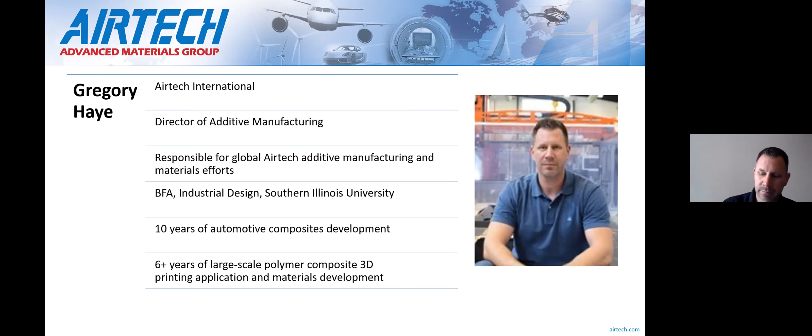Hello, my name's Philip Lunn, also with Airtech International. I'm the Global Technical Manager, responsible for global technical activities, developing products and supporting our customers with their applications.

I've got over 30 years experience of composite fabrication, originally starting in aerospace with some time in automotive and motorsport before I joined Airtech Advanced Materials Group about 24 years ago, and come to the project of 3D printed tooling with the experience of fabrication of composite tooling using traditional wet lay-up, pre-preg, resin infusion type processes to produce composite tooling, and bringing that understanding to the development of 3D printed tooling to develop tooling which is meeting the requirements already expected by the market, but building on that as well and developing and improving what can be achieved with tooling for the composite application.

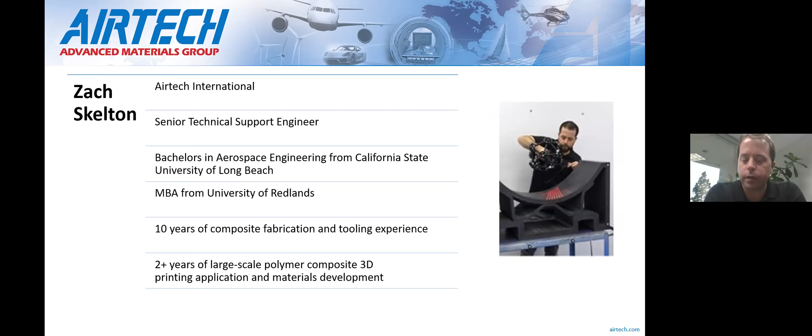Thanks, guys. So as you see, we brought a good team for you guys today, and we're going to kind of walk through trying to bring some clarity to the technology readiness of these resins and this process. And so on the back end of this, Zach and Phil will both be available, as well as myself, to talk through any follow-up questions you guys may have in a Q&A session. So we look forward to your questions on the back end of this.

Really, additive manufacturing is a new technology for most people, but there are many barriers to production use that people tend to recognize or think are not yet mature. So these are some of the things that we've recognized that are either commonplace or people's perceptions. But generally speaking, there's been a lack of mechanical data on the current materials that are available for primarily these FDM or FFF type of applications using filaments or pellets.

And maybe not a whole lot of information of these tools or end-use parts being proven in application, especially at large scale.

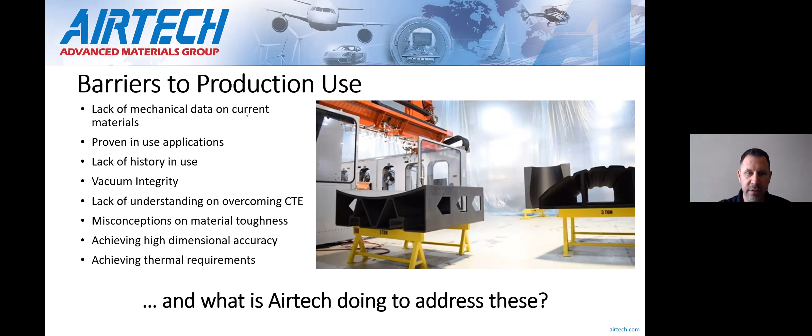And so we kind of took this as our goal, to go and solve these problems, right? So not only just the materials themselves, but looking at the materials in their application, and can we prove out their performance?

So from a materials and functional testing perspective, most materials on the market, the standard was just using injection molding data. And that's not real for these applications, right? The properties you get in X and Z are much different in a printed specimen using FDM or FFF type processes compared to an injection molding compound. The properties in all directions, as well as the CTE, are all impacted by this versus an injection molding type coupon.

So this really helps us, starting with the right data, helps us and our customers that are designing these tools or structures to have the right toolkit, the right data to make good informed decisions on design and how the tool and our part is going to work in their applications. Without these key metrics of data from printed specimens that are subjected to testing in these various modes, it's very difficult to do a proper analysis and proper design.

So we've made that our mission, to go through and do all this work, have the entire list of all the properties for these materials in their applications, in a printed application, and then be able to hand this to our customers, either that we're producing tools for, or that we're providing resin to. And we're fully transparent about this. We do it even with third-party labs to validate this information. So it's fully open to our customers: here's the actual properties, there's no marketing to it. It's here's the data and here's it verified by third parties.

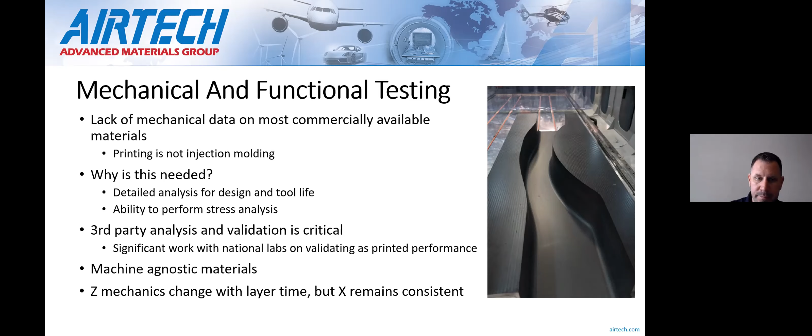Again, that track record's been missing. And so we're going to prove that.

Our focus has been specifically on tooling, as Airtech is supporting our broader global composite customers. We are looking at how do we solve these problems for our customers every single day in various applications. So everything as simple as a printed master, basic trim jigs, drilling jigs, or sawing fixtures. These are low duty applications comparatively, but require good, tough, durable, and accurate surfaces. So we do that all day, every day with a lot of our customers, even in production type rate tools today. But the biggest scrutiny is to come on the high temperature side of things.

And this is where a lot of people seem to be most interested, is high temperature tooling applications, right? So either high temperature out of autoclave or high temperature in autoclave is where there's a lot of cost in the tooling and a lot of time. And so this technology with our high temperature resins has been very attractive to a lot of our customers.

So to help kind of debunk if these tools could be used in these processes, Airtech made a large investment into taking this example tool you see on the screen and placing it through a rather rigorous testing regimen to prove that it could be production feasible and capable compared to anything else that's been in the market. And previous to this, the only real information that was out there was maybe a handful of customer data, a couple of labs had done some specimens that maybe had done 10, maybe 20 cycles, and called that good enough, or saw some reasonable data that they thought was going to be good enough.

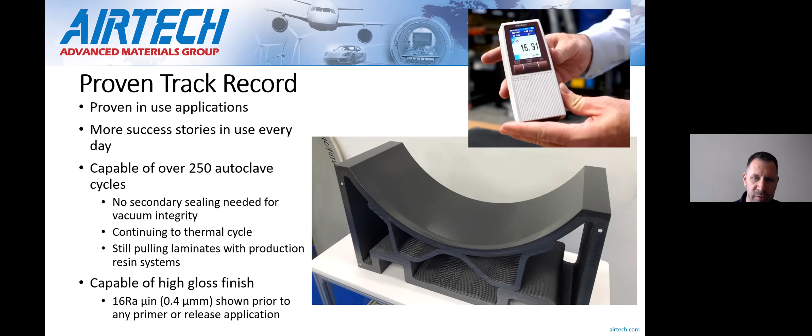But we're continuing to, we've already reached this threshold of 250 autoclave cycles with great success, even pulling laminates along the way and finishing this tool to a high level. So even in this tool here, we're seeing about a 16 RA micro-inch finish with just basic post-processing. So printing, milling, and then some basic hand finishing and a tooling sealer applied. And so we're seeing these vacuum integrity benefits and surface finish benefits of the 16 RA, for example, even before a primer or anything else goes on the tool. So I'd say typically most of our customers are looking for something around a 32 to 63 RA micro-inch, and that's easily achievable. And again, vacuum integrity and as a fully durable finish.

So next, we're going to talk about some of the performance of these materials and how we talk to our customers about these things, but also how we're validating these things. And I'll hand the ball to Zach here.

So because it's an extrusion, you get these anisotropic properties. This is in some ways very similar to traditional thermoset composites, but everything's kind of turned 90 degrees. So when possible, obviously we'll do our best to control the CTE, which is typically lowest in the X direction, which is the extrusion direction, and Z would be the stacking direction. So quite often we will try our best to print it in the situation you see on the left, where X is dominated down the length. So it just really keeps the CTE down on the length of the tool.

But sometimes that's not possible. So we also have the option to do a horizontally printed tool that's quite typically driven by geometry. But that would leave you with a Z direction that's running down the length of the tool. And then the low CTE kind of circulating as those loops go around.

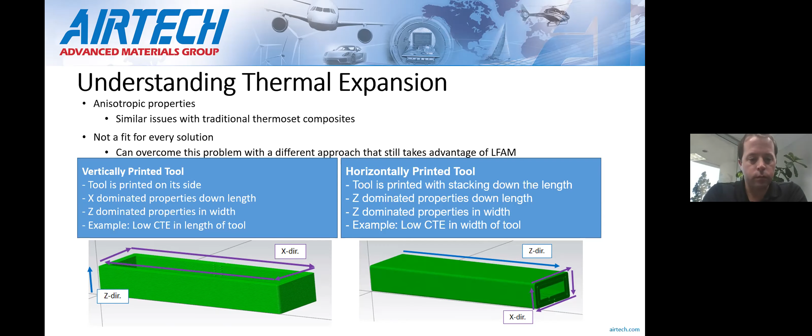We also did a fiberglass leak check. It's more as a way to isolate that even with that 0.2 inches of mercury, the tool itself in the field area is not losing vacuum integrity.

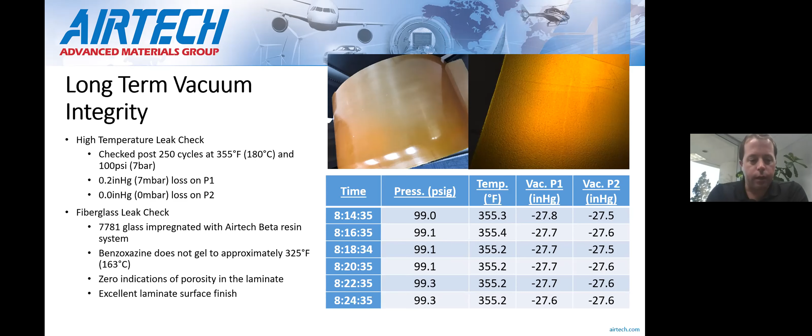For those of you not familiar with the process, you take some thin fiberglass, like a 7781 style fiberglass, and we impregnated it with our own benzoxazine resin system. Typically in the industry, this is done with epoxy, but we chose our benzoxazine specifically because of the very high gel point of 163 C, where the benzoxazine starts to cross-link and thicken. We wanted as broad a window as possible, where you might see any air getting entrapped in the laminate. Again, what that would look like is almost like a starburst of porosity coming through where a leak would be in the tool face. As you can see, a very clean laminate, a very high gloss as well, but zero indications of any porosity in the laminate and just an excellent surface finish.

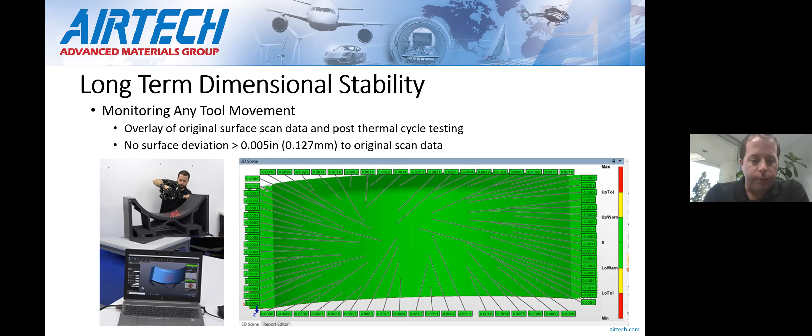Also looking at how the surface holds up, a common misconception is about the material toughness. Greg kind of mentioned it, but the material itself is approaching the hardness of aluminum. As many of you know, aluminum's been used for decades in the composite industry. So we've seen really excellent laminates coming off with all of our own resin systems: our benzoxazine, our Toolmaster epoxy, our cyanate epoxy, and our LTC, low temp cure epoxy systems.

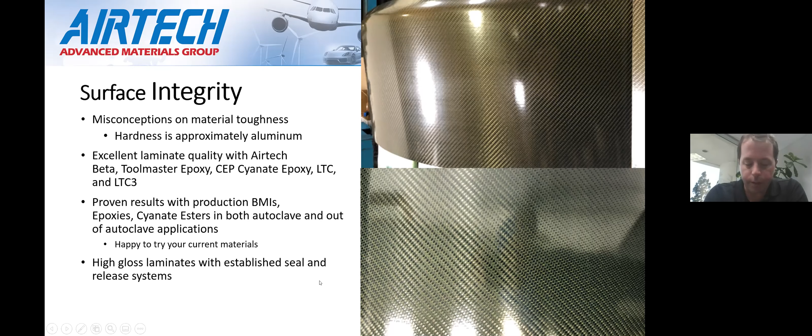Also looking at things visually, this is the tool after 250 autoclave cycles. You can still see that it's got a really good surface finish there and it's holding up well, but no visible deteriorations or evidence of any kind of oxidation or surface damage.

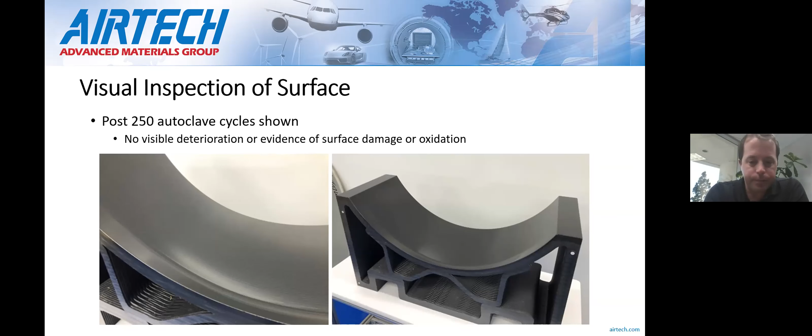Also looking at things under the microscope, about 1,000-times magnification here. Really no evidence of microcracking in that surface. The Achilles heel of traditional thermoset composites is that they will microcrack, and over time those microcracks will ultimately lead to a loss in vacuum integrity or gross delaminations. We're really not seeing any evidence of that whatsoever on the tool surface.

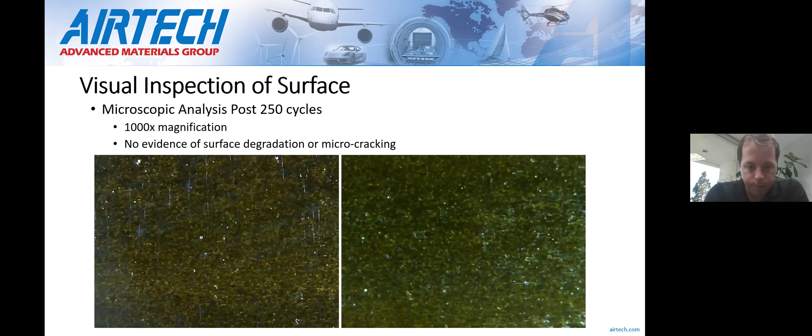As far as the accuracy capability of the molds, what we are finding is that it's a limit of the machine, right? So as long as you have a machine that can cut, say, aluminum very accurately, you can also cut these materials very accurately. We've seen great results both in our in-house testing and with customers, and that would include precision holes that can be installed in machining. We've seen a lot of proven results with masters, layup molds, pre-form tools, holding fixtures, trim fixtures, drill bars. You name it, there's definitely a fit for this technology.

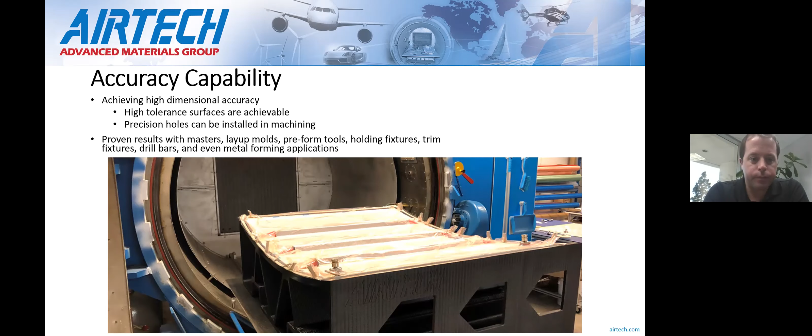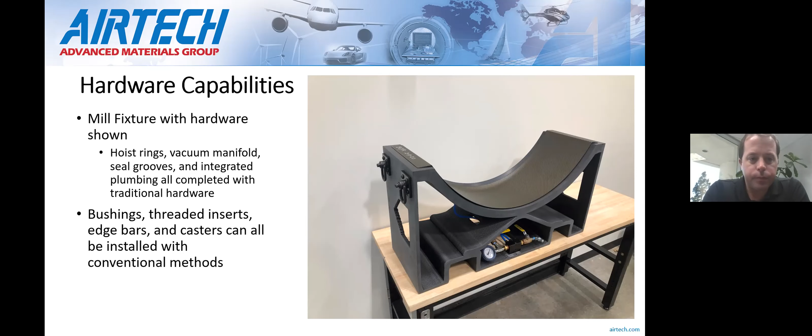Also looking at things more holistically, like what else is in contact with the tool, whether it's sealant tape or bagging films. We've really vetted all those out, and we have a complete catalog we can provide that goes through and says, with this kind of tooling, here's what we recommend. We've tried it, and it works very well.

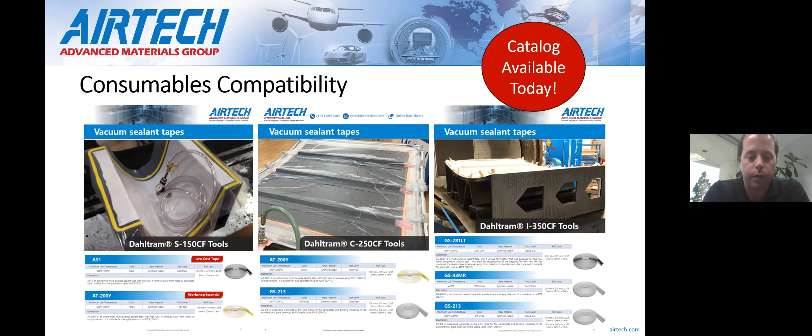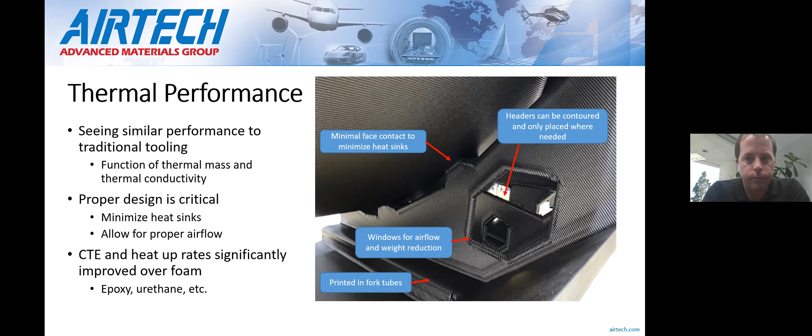Our goal here today was really just to give you a little bit of background information and show you that the information is there, at least from Airtech as a resin supplier and tooling producer, doing large scale tooling for the past year and a half. We really try to put ourselves in our customers' shoes and ask what your worries and concerns are, and make sure we address them. And the answer is yes.

We have way more data than we can show you in 30 or 40 minutes of presentation, so we left some time today to talk about these things with you as participants, and address some of your specific questions, which may require a much longer conversation. We have our contact information on screen for you to take down, and if you'd like a follow-up conversation to get into more detail, we have a wealth of data on our materials in various applications, fully validated to many customer specifications, even at the OEM level.

We'd happily entertain your questions or comments today, as well as beyond. Please reach out to us, and we'll be happy to engage you and provide information showing how these materials can work in these applications in a production-ready scenario.